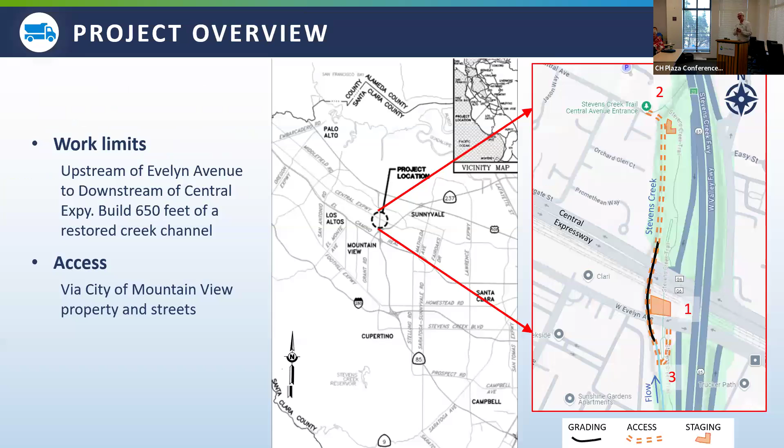Project goal. So the goal of the project is to restore this section of Stevens Creek and create better access for Central California Coast steelhead.

The upper right image on this graphic shows a photo or rendering of Central California Coast steelhead. They have breeding grounds, or what biologists call redds, upstream of the project. These steelhead are currently considered a threatened species by federal fishery agencies, and it's a priority for restoration on Stevens Creek. This particular reach of Stevens Creek is considered a barrier to upstream passage by the same fishery agencies.

The proposed solution that we have here is to put in a nature-like channel, otherwise called a roughened channel, composed of large boulders, and we're also going to include a fish habitat structure as part of the project. The habitat structure is constructed of large redwood trees that were downed and are going to be placed in the creek.

Valley Water used guidance, standard guidance from the agencies, manuals to carefully design these features. We also used advanced hydraulic modeling techniques.

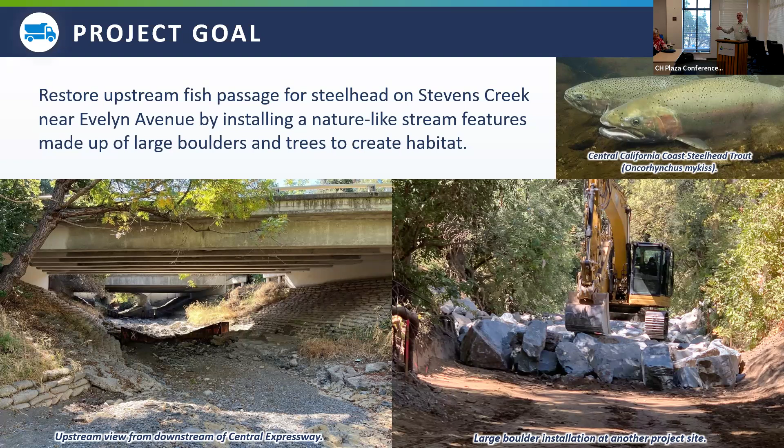You can see the size of the excavator that's needed because it has to lift, manipulate, and place very large 1 foot to 4 foot boulders, or 1 ton to 3 ton boulders.

Here's a view of the project schedule. So we're on track to start construction this summer, most likely early August, possibly mid-August. Valley Water has been working on design since 2023, as you see in blue on this graphic.

10 contractors were pre-qualified for this specialized work. As you can see in purple on the lower left, that was completed in February 2025. The design work was completed in April 2025. At that point, we went to public bid and we received bids from the pre-qualified contractors.

This resulted in the award of the construction contract to the Granite Rock Company, as you see there in orange. That occurred in June. Actually, our notice to proceed was literally a couple days ago.

The actual start of construction depends on the approval of the contractor's detailed work plan, and the permits they need to get from the city. There are final permits they need to get from the city, the county, Caltrain, and you can see that indicated in the green bar on this graphic.

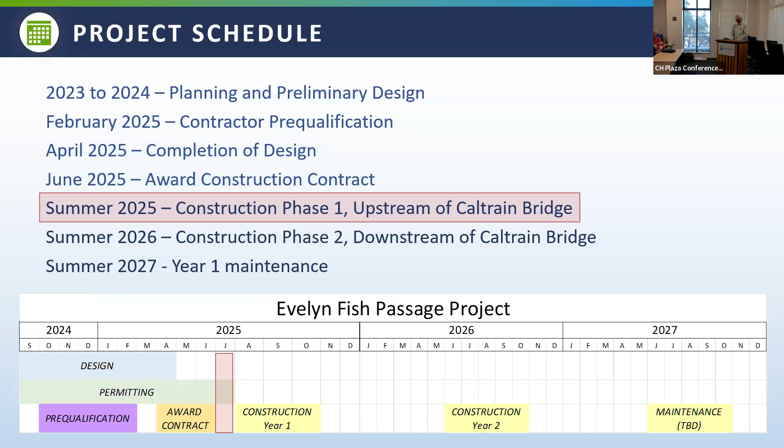To build this channel, we're going to have to bring in 7,000 tons of large boulders and rock and truck those into the site by way of the city streets. The rock is going to be carefully placed with an excavator, like I showed in that other image. The idea is to recreate something that simulates a natural stream bed.

The shape of the channel was designed to create pathways for juvenile and adult fish, steelhead, to pass. The rocks were also designed to be stable in large flood flows, big flood events. So the concern about the whole project washing out in a flood should be covered by virtue of the analysis and design we did, providing large rock to be stable in major floods.

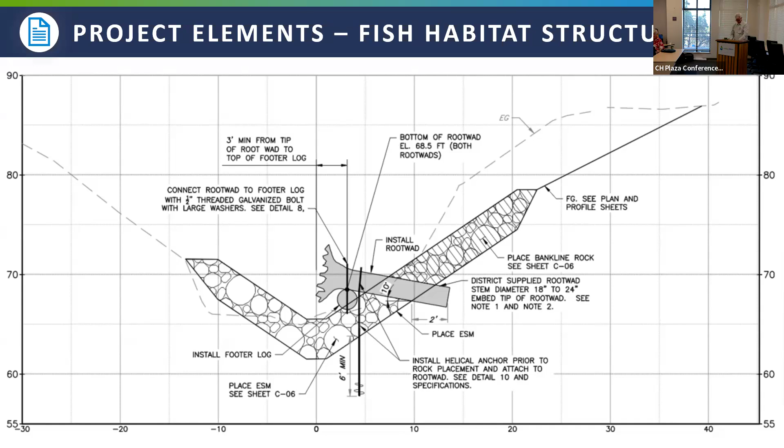So, public impact. I'm going to talk in more detail about public impacts of access and staging. This is a graphic showing an overview of locations of access and staging for the project.

In the bottom center of the project, you can see staging area number 1. This is the contractor's primary access point. It's in a gravel lot just off of Evelyn Avenue, owned by the city. It's shaded by that orange trapezoid there, in the lower center part of the image.

At the top of the image, you can see a second access point called staging area number 2. That is located at the end of Central Avenue, not Central Expressway, Central Avenue. It's identified with that L-shaped orange polygon there.

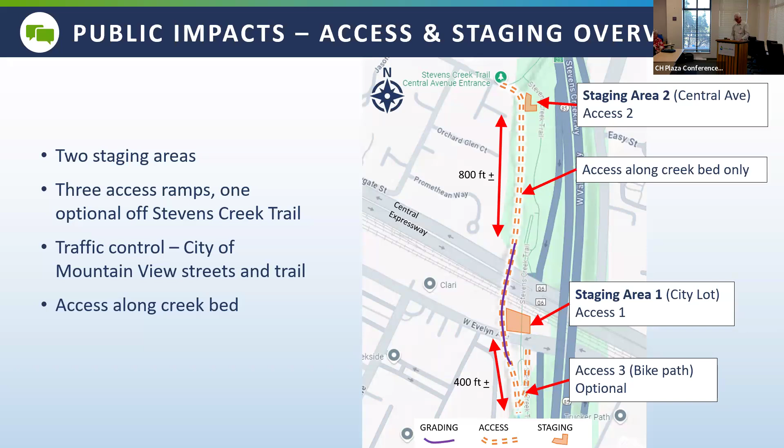So getting down into more detail about each specific area, these are images from access and staging area 1, the city lot.

At this location, the contractor will be storing equipment and materials. A temporary access will be built to the creek at this location. Traffic on Evelyn Avenue will be intermittently impacted as trucks turn in and out of the staging area. The contractor will be required to have flaggers along Evelyn Avenue for safe flow of traffic.

The location of the driveway to the staging area, you can see where that blue rectangle is on the image on the right. It's basically a curb cut off of Evelyn.

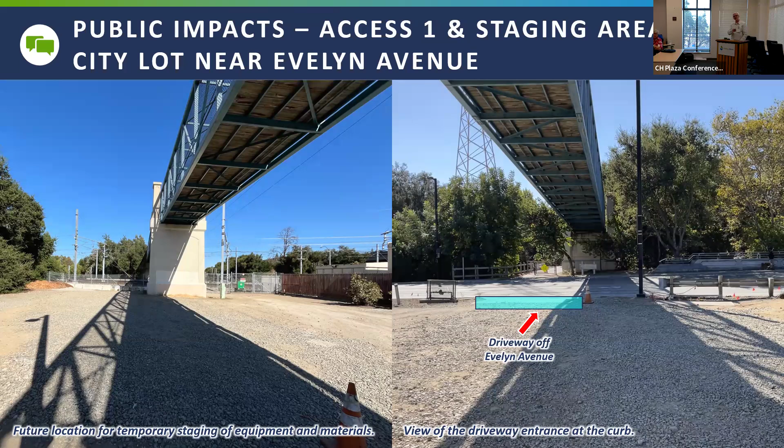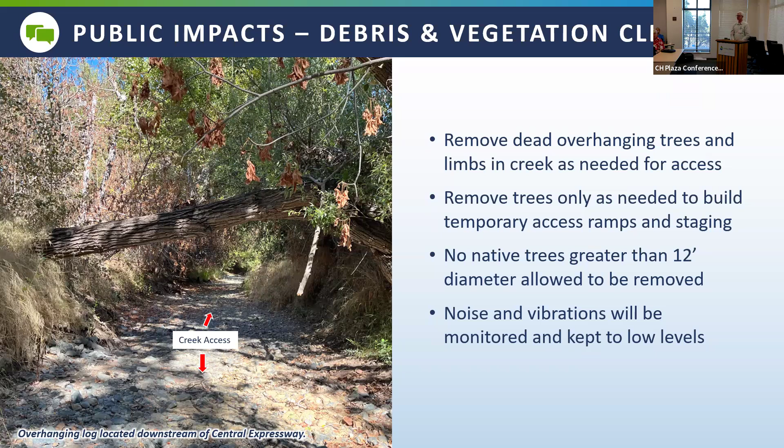Noise and vibrations will be monitored throughout the project and kept at low levels. The actual equipment will be operating down in the creek, so perhaps being recessed in the creek might dampen the noise a little bit, to be determined, but nevertheless they need to be compliant with low noise and vibration requirements.

Access 3, optional access 3. These images show access along the creek bed. The contractor will have an optional access point along Stevens Creek, along the Stevens Creek Trail, south of Evelyn, if they so desire — they would of course have to submit a plan to do so.

Valley Water certainly recognizes this trail and bridge as an essential path, especially the bridge as a connecting point to various parts of the city of Mountain View. It crosses over some major streets and railroad tracks, so we definitely recognize it as an important trail. To limit the impact on commuters and recreational users, we've closely coordinated with the city for short-term and optional use of the trail for access.

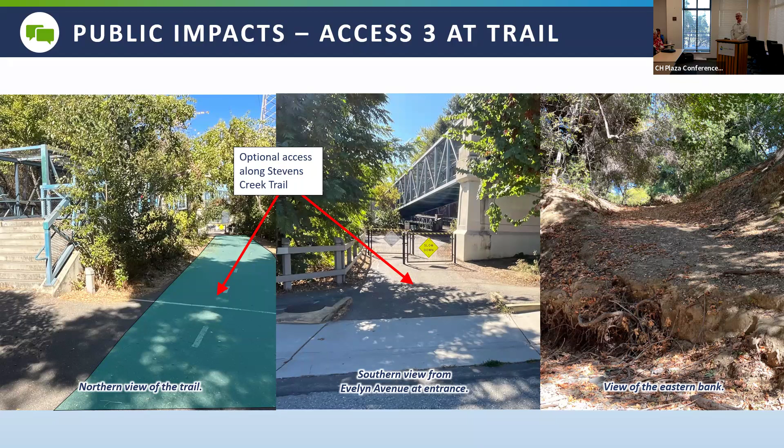So, in summary, after this word salad, here's a summary of impacts we think are part of the project. Most likely you're going to see a lot of traffic control on the city streets, depending on the contractor's submittals and approved submittals. There'll be some dust control related to construction.

Whenever you dig, you're going to disturb the ground and generate dust. We have requirements for the contractor not to create dust. There may be temporary and limited closure of the Stevens Creek Trail, and there will be noise and vibrations, all within required low levels.

Work hours will be 7:30 a.m. to 4 p.m. Monday through Friday, according to city requirements. There will be, if approved by the city, contractor day-only parking at Central Avenue — we think this is important so as not to impact the public. And there will be vegetation trimming, with removal of vegetation minimized as part of the project.

You can see it on this graphic on the lower right. See that angled area? You can see the location of the rock. And then above the rock on the lower right image, where it says 2:1, 2:1, that's where native grass would be planted to stabilize that slope. You see that? It's that little spot right there.

Okay, thank you. I could use the laser pointer, but I don't even know how to use it. Nobody wants to get hurt. Thank you, great questions.

And Carl, did you have something to add? I was just going to add, the other function of providing the grass on that slope is, over the wintertime, to provide erosion protection of the soils. We don't want to add more soil that can erode into the creek because that impacts things.

Are you just going to have like burlap or something to stabilize the native soil? Yeah, well, natural coconut fiber, basically, so it kind of naturally decays over time, but it also provides stability as the grass grows and establishes.

Yes, sir. So I think this is the third time that Valley Water will be working on this section. I wonder if you have a good understanding of what's gone wrong in the past, so you're not repeating it.

Yeah, speaking to that, there are a lot of complexities. As I indicated, there's remnants of a 2015 project - you could actually see it in this image. Yeah, they did a lot back then. They used the best modeling that they had, and I think they built a project to the best of their knowledge at the time. We learned a lot from that, and we're coming back, and like I indicated, we're sizing the rock to be large enough to be stable in a flood event.

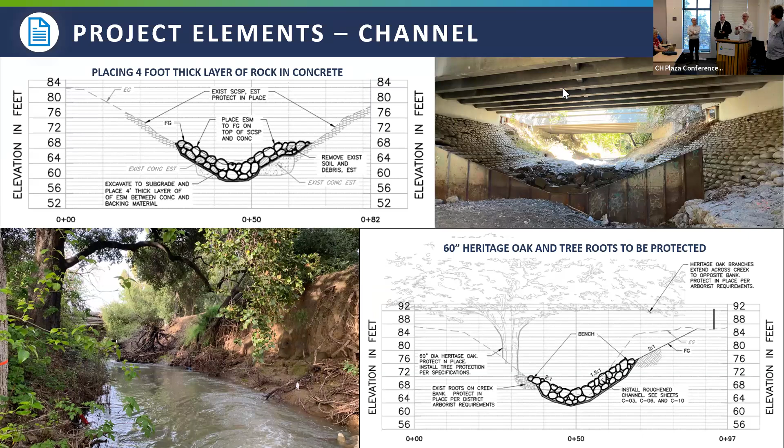Actually, I would say the bulk of the trees we anticipate removing are not in the creek. They're not shading water, and they're not most likely providing canopy over the water. It's simply to develop the access ramps and the staging area, which I showed earlier, to be able to fit the equipment in those areas — and the staging area too.

And again, there'll be an arborist involved to approve any kind of action on site to protect the tree roots. I'm not an arborist, but I didn't see any other undercut banks or trees falling in the creek in the reach. There are some in Palo Alto, though — in Palo Alto they're there. I also showed an image of a dead overhanging tree, and it's pretty much 5 feet in the air.

I also want to add that throughout this whole process we've been working with a whole regulatory team as part of what we call the Stream Maintenance Permit Program. This project is permitted — is it maintenance? Maintenance, the Stream Maintenance Program, not management, yeah, that's right. So that involves an active team of CDFW, NOAA, the federal agency, National Marine Fisheries Service.

The regional board is involved in this, and I don't know if you're going to speak to that. We're within the guidance of the regulatory team, and they've been actively reviewing this project for multiple years. I don't know if you want to talk about SMP.

Sure. So SMP is a stream maintenance program used for maintenance of our streams throughout the county. It's a way we plan for that maintenance and permit it, and this project is being done under that set of permits. We've been very strongly engaged with our regulatory agency partners, including the regional boards, CDFW, National Marine Fisheries Service, U.S. Fish and Wildlife Service, and the Army Corps of Engineers. They are approving of this project. They like this project.

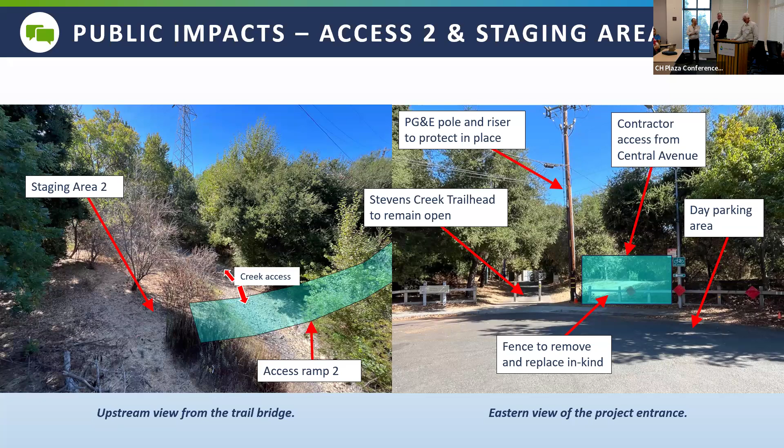When we know trucks are coming, we're going to give you advance notice. Our goal is to give you plenty of advance notice. Sometimes it's a day or two or three, but our goal is to inform you as far in advance as we can as the contractor moves forward with accessing the material and things like that.

Yeah, and as Carl said, we'll know more when the contractor gets further into the project and has a plan in front of us. But for the picture, a truck can haul maybe 10 to 15 tons, probably not more per trip. So it's really up to them, per our approval, how this is going to play out, and how heavy the trucks can be on the city streets. Right, and in compliance with any requirements the city has, like where they can go, et cetera.

Quick clarification, staging area 1 by Evelyn - is there any access from there? Could you get rock from there down into the creek? Exactly, yes. There is, and in fact we've used it before. Back in 2015, that was one of the access points used to build a ramp that goes down into the creek. So we provide multiple locations for the contractor to access it, mostly for expediency and efficiency.